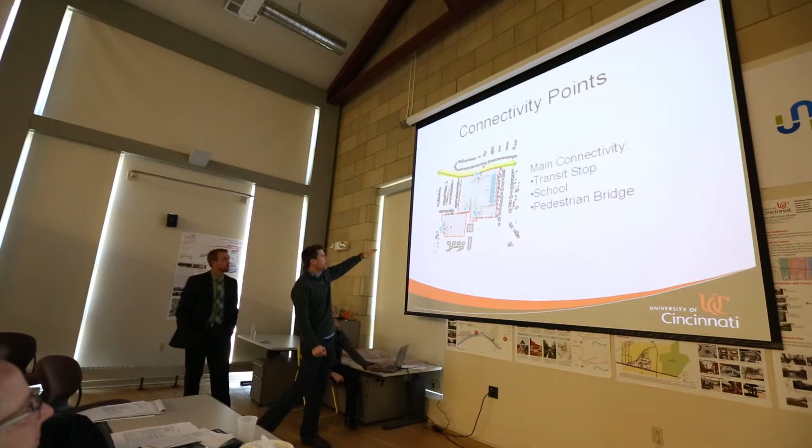Just running through some connectivity points. Mapping out, down here to the west is where a large stack of high school students will come, over the bridge at Dana Avenue. Then up to the north, we looked at the transit stop, which will go in at the medium level, connecting to the space.

Identifying different users: the blue we highlighted as neighborhood residents, the green is Wasson Way users coming into the space, and the red is the Withrow students. Looking at the space and where students are coming from gives us design cues of where to place certain elements.

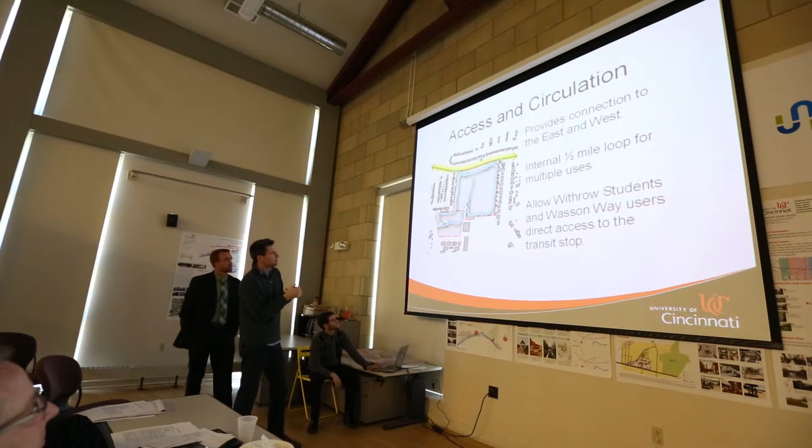Access and circulation: moving toward development cues, we're talking about an internal loop and where everyone's getting into the space. Up north, we have the bike trail coming off into the space off the rail outside of the stop, so we'd avoid clutter in that situation.

So it's hard to read on here, but we'll go into different uses. For the spontaneity of the space, rather than fixed forms and functions, we are promoting design spaces that accommodate shifting interactions of users during the open space workday and class hours.

But on weekends, the space can be programmed for festivals, marketplaces, educational purposes, as you'd see in Washington Park or a comparable public space. It can be transformed into community space for different uses, promoting health and wellness, which Hyde Park and area residents along Wasson Way are really high on, and serving as a public platform for Wasson Way to call their own.

If you want to have a fundraiser, a grand opening party, a concert series, or anything with Wasson Way's name on it, it could happen here. This might be a little better to see on the board, but we highlight different uses that could happen.

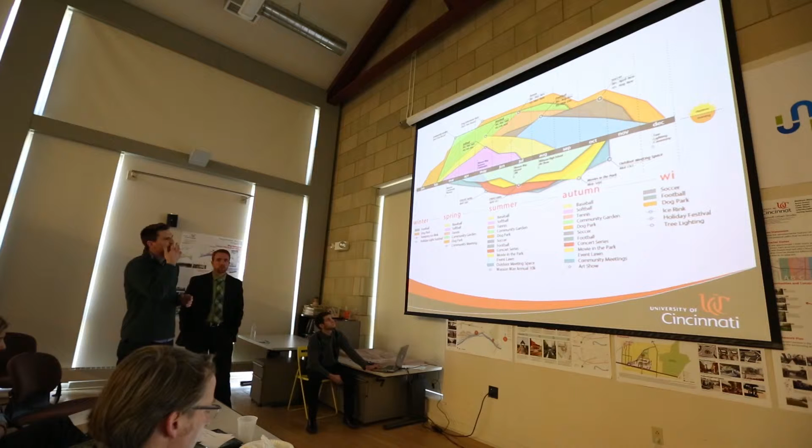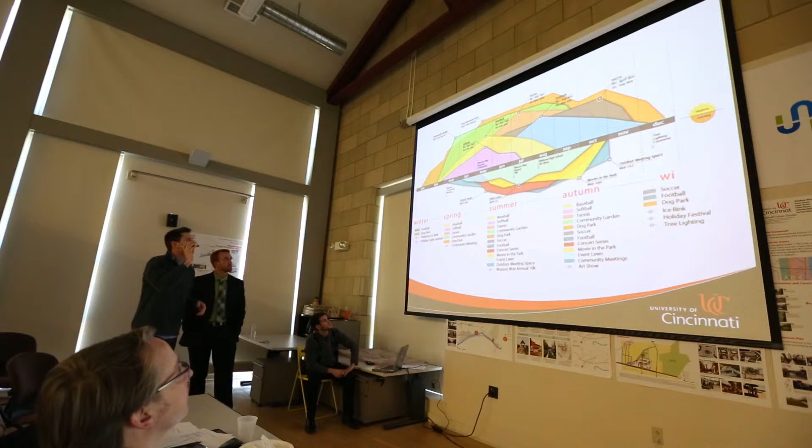On the top side, we are looking at daytime uses that could happen during school hours, both on weekdays and weekends. On the bottom, we look at different evening opportunities. Through the different seasons, in winter we could have a holiday light festival, a tree lighting ceremony, a temporary ice rink.

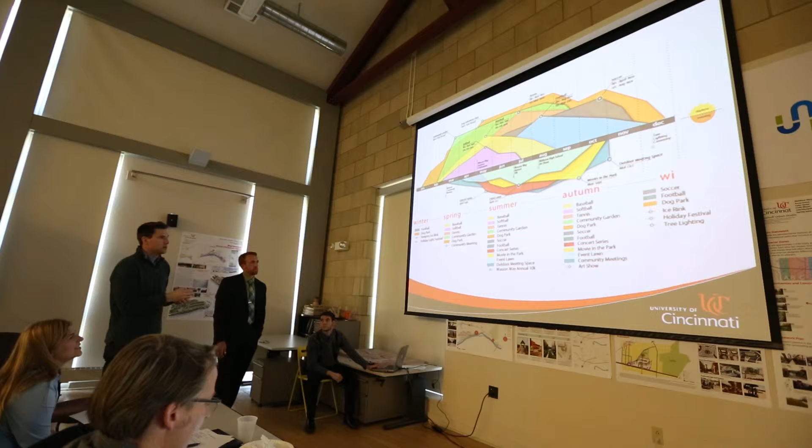We could have a different holiday festival where we line the internal loop with festival lighting, an art show, the Wasson Way annual 10K which we just created today, and a Withrow High School Art Show, anything that could happen in public space in this region, because we think there's a demand for it, and Wasson Way, once fully developed, will call for it.

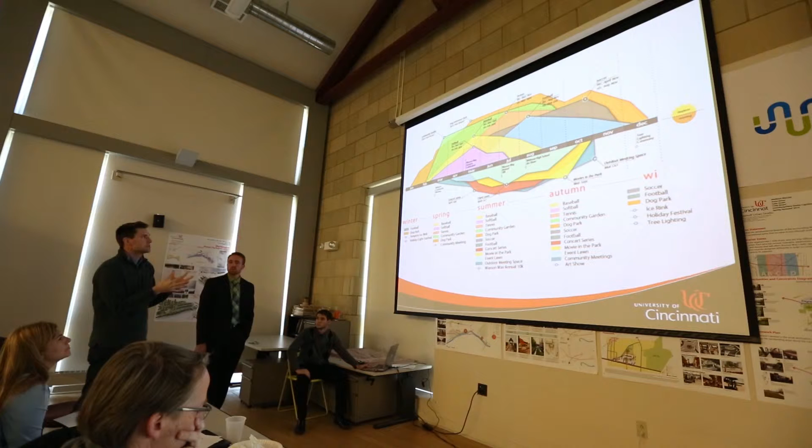Concert series, event lawn, outdoor meeting space, movies in the park, Wasson Way summer celebration - possibilities are really endless. At the top we highlighted what months these sports would happen during recreation time, so we're talking Little League and different soccer or football.

And then we have the high school time of scheduling as well within all the sports, so it can be used by all the different users.

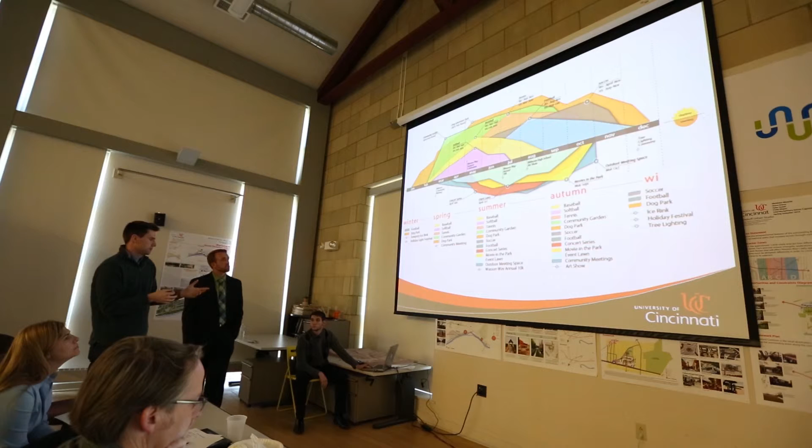Just highlighting some of the stuff that we looked at in our site plan. We're going to have a mixed-use trail for bikes, walkers, and runners, about half a mile long. We're also going to have a dog adventure park. It sounds fancy, but it's a dog park with agility features attached to it, and maybe a shallow pond for the dogs.

The baseball and softball fields exist today. We would reposition them to get a better use of the space. There are also tennis courts, a performance plaza, the community orchard, which we'll go into, a large open space that can be used for many different sports and recreation uses at different times of the year, a community event space, and the community garden.

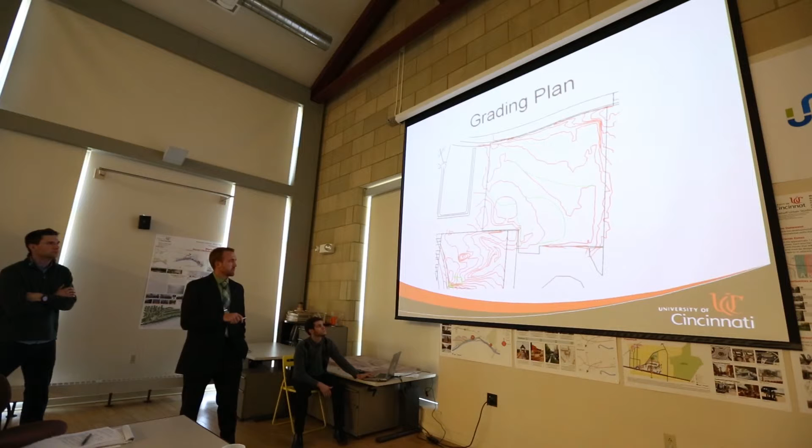Down here in the parking lot, that's a pretty low area coming off of a higher street. So we're looking at roughly close to a 10-foot drop from where you entered. It requires quite a bit of fill there to bring it up to the right space.

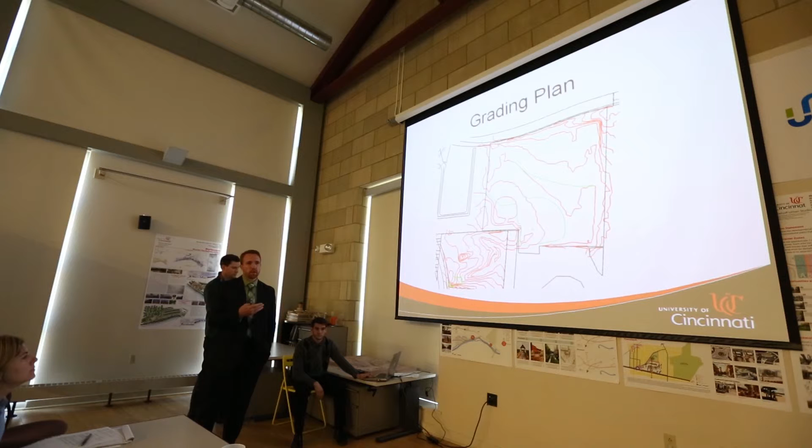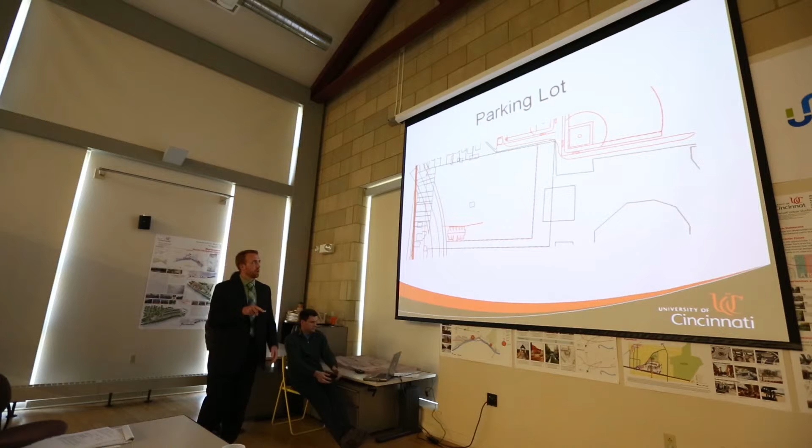Onto the potential parking lot. Like I said, it's not required now because we're not shifting uses. It's a recreational area right now, and after examining City of Cincinnati code, it says that if you're shifting uses, you need 1 space per 100 square feet of indoor space, which we don't have. But the parking is already there, overlapping with the school, and there's parking behind the building as well, with access from Dana Avenue into here.

So this is just the ideal size on this. We limited it to what we thought might be necessary for potential use. We expanded further north, but it's pretty much limited to the east due to the dog park and things like that.

Since the code says from 0 to 800 square feet, if you're going from pervious to impervious, then you don't need to worry about remediating the stormwater. We're obviously more than 800 square feet, so from 800 to 10,000 square feet you need to provide a means for the runoff to access the storm sewer system. You don't need to worry about retention or detention unless you get above 10,000 square feet of impervious space.

So we did look at numbers and ran numbers for the storm system, getting from the dog park, the pond, and the branch up to the pond as potential drainage and overflow.

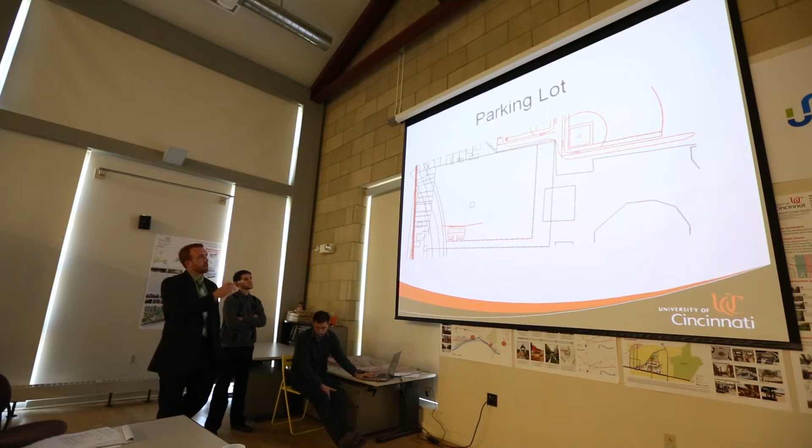Just covering a lot of this, we ran through costs and things like that. Rough cost for the 17 additional vehicle parking spaces would be about $86,000. That includes grading as well as pavement, looked at after doing several case studies, roughly $5,000 per parking space. And then the rough cost for the storm sewer is $23,000, which includes pipe material, excavation, sub base, and backfill.

Going into the landscaping and community garden, our full set of landscape design as well as the community garden kind of integrated the two. The focus on this is going to be more community involvement and edible landscape type things on top of the traditional produce.

Just kind of a character palette as far as what we're going to cover.

One big thing is the raised garden beds. This would eliminate the need for soil remediation. Since new soil is going to be brought in, you don't really need to worry about the contamination that could be there, or the blight from the potential freight line.

This is kind of where it shows the layout, looking at some more green development, community space, but this would all be just pervious pavers so that way you don't have to remediate that runoff, since that area is above 800 square feet. Providing access through.

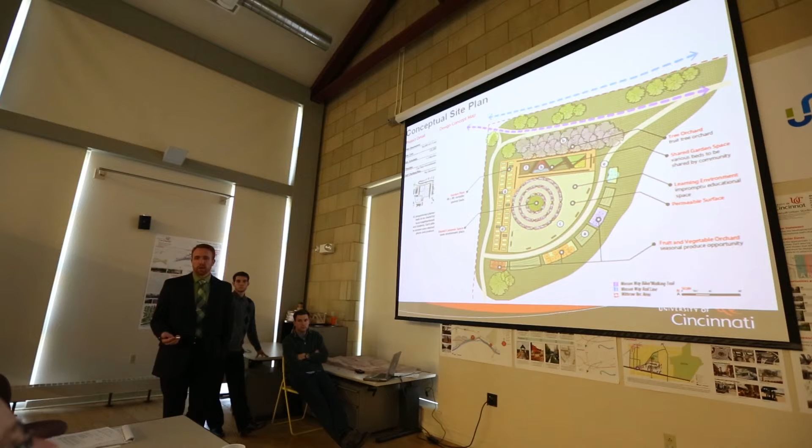All right, so getting into the dog park. Basically, what we want to do is provide a fresh use for an area of the Withrow Rec area that's pretty much unutilized. When I was out there doing observations and taking pictures, it seemed like everyone was either over by the ball fields or over by the playground, and no one was really in this corner of the area. So we wanted to bring a fresh new amenity to the park.

So these are some of the things that we want to provide within the dog park. We looked at putting in a dog pond like they did at Inman Park, not too far from here. We would also like to do some agility equipment. There have been a lot of reviews on dog parks in the area where dog owners either wished a dog park offered this agility equipment, or were really excited that parks had it, so we thought it would be a good idea to provide space for that.

We also want to provide drinking fountains that are dual purpose, so they have a spot for your dog to get fresh water as well as yourself. We also provide seating in shaded and unshaded areas.

So this is kind of our general idea of how to lay out the dog park. You're going to have a separated area. So up here you would have a small dog area.

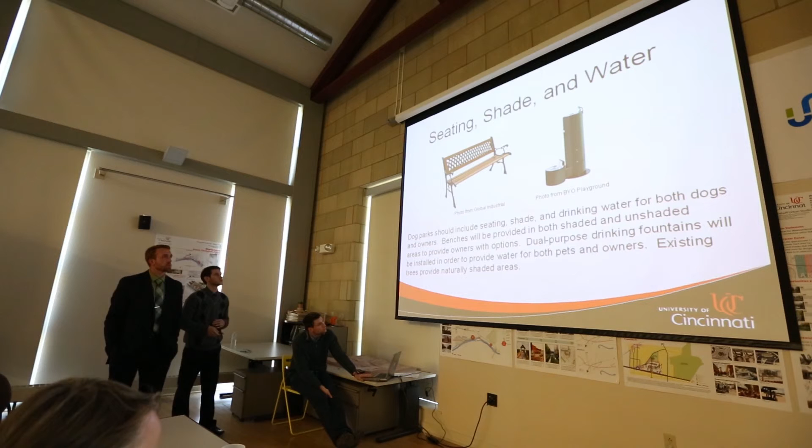This here is one of those dual-purpose water fountains that I was talking about, and basically what it does is let you get fresh water for yourself and your dog.

The internal trail that we laid out is approximately a half a mile in length. We're proposing a 9-foot wide path so that it can accommodate all users.

We were thinking of either using asphalt or crushed stone dust to build this trail. The crushed stone dust is cheaper. It costs a little bit more to maintain for the first few years, but after that, in the long run, it costs a little bit less. With crushed stone dust, you can have runners, bikers, and push strollers on it. The only two things you really can't do on there are skateboarding and inline roller skating. The asphalt will be able to accommodate all of those, but it's a lot more expensive.

So for the train stop layout, we basically sectioned off an area for this, and since we were really dependent on the design of the overall system, whether it was going to be one track or two tracks, and how they were going to route the bike trail, we talked with Dr. Miller about this, and we decided that leaving off an area for it would be okay. As far as going into in-depth design for it, we're going to leave that open for the overall design.

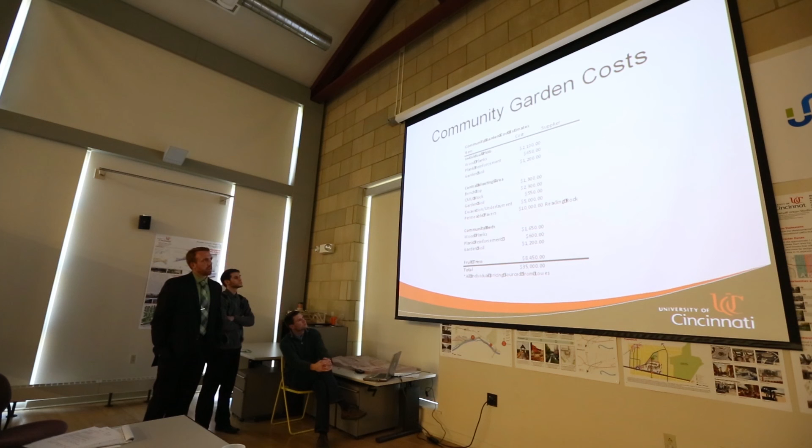So then on the community garden cost, this just kind of includes the raised garden bed cost, as far as planks, things like that, and then garden soil based on a cubic yard price found from one of the local distributors. At the bottom it lists all the individual lumber costs and things like that, gathered from the nearby home improvement store at Lowe's. Roughly it's going to be about $35,000. The permeable pavers from Reading Rock are just another one of those green elements to alleviate cost and help with stormwater alleviation.